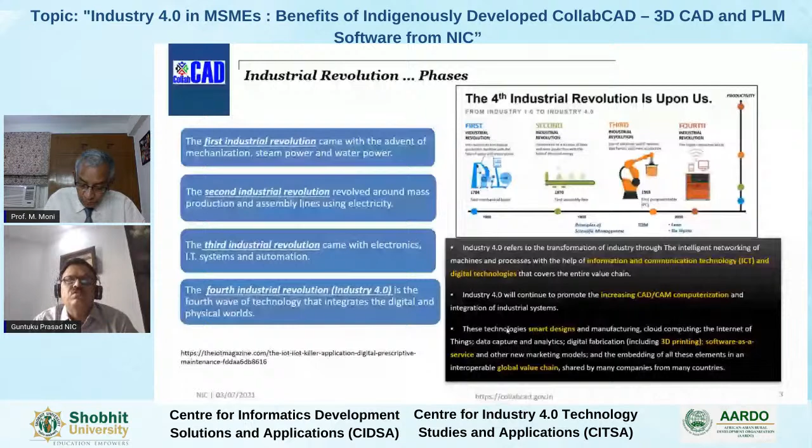So we'll talk a little bit about the fourth industrial revolution, digitalization now. There are a lot of technologies helping in the digitalization of Industry 4.0, which may be relevant to the manufacturing industry. Some of the things are advanced robotics, where we talk about industrial robots, and a lot of integrated sensors and standardized interfaces which help in digitalization.

Recently we are talking about the second topic, 3D printing, which is additive manufacturing technology. It's especially useful for generation of spare parts and prototyping, and it helps in decentralization of 3D facilities, reducing the transport distances and the inventory also.

Then augmented reality, virtual reality, or recently called mixed reality. It is used for maintenance activities, for logistics, and even for training, and it helps in a lot of demonstrations, especially for supporting information of the products. Especially you use the glasses and all, it's all digital technology which is used. A lot of research is being done right now in academic institutions also.

Then some of the things like industrial internet, which talks about networking of machines and products. It's also important to have a good cloud infrastructure so that you can manage the huge data volumes using open systems. And it helps in having real-time communication for industry, manufacturing, and production systems.

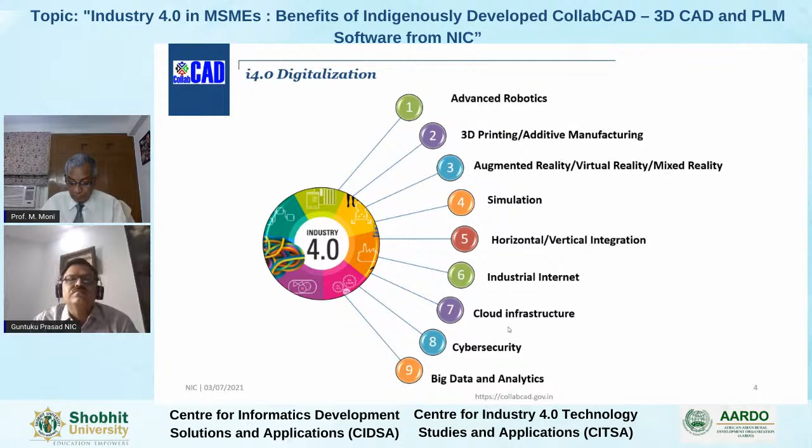So a little bit I'll touch about 3D printing, which is a hot topic right now. We talk about traditional manufacturing, where it is mostly subtractive and there is a lot of wastage of material, with operations like drilling, turning, and shaping. Basically, if you have a building block and you're trying to manufacture a part using traditional manufacturing, there is a lot of material wasted.

The advent of additive manufacturing has helped to fabricate a physical three-dimensional part, typically from a CAD model generated in CAD software, by quickly automating using a total flexible manufacturing process, so there is less wastage. Especially if you see the second figure, there is a lot of layer-by-layer based manufacturing, and so there is less loss of material.

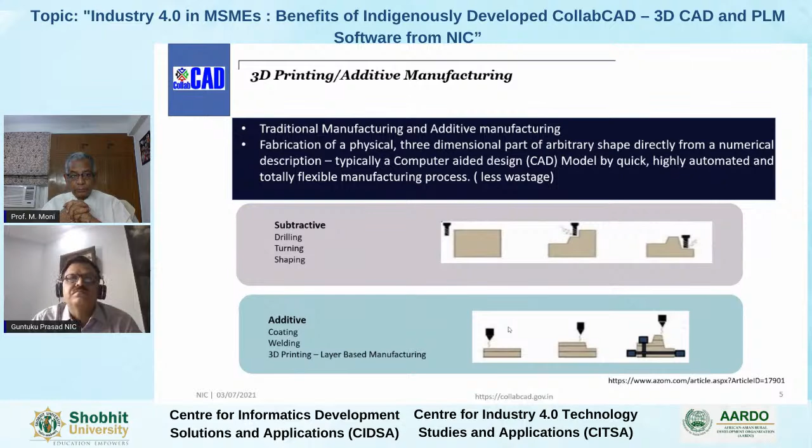Obviously you will get a lot of benefits of 3D printing. These are some of the benefits we are representing pictorially. Making repairs is very easy, like automation and all, and it even reduces the material wastage.

Especially, they are able to print directly using body parts, and a lot of localized production can be done, which helps the growth of economy and logistics. It improves the logistics scenario also, and enables flexible and efficient manufacturing in the industry. And especially the most important part is reduced wastage, so we have a lot less wastage of raw material.

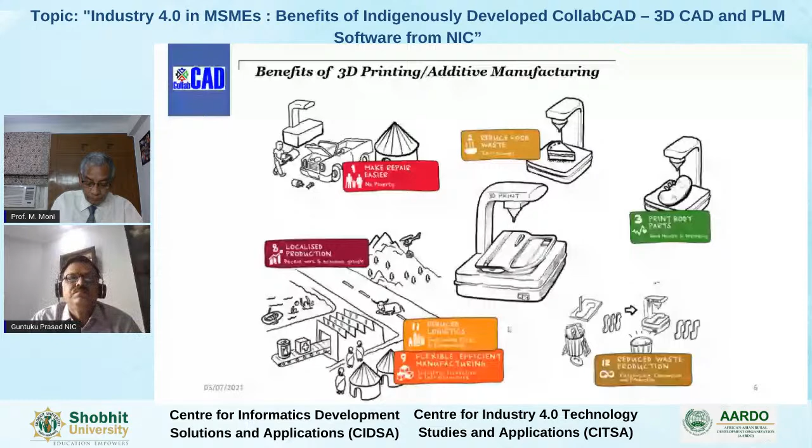These are also some of the technologies. I'll talk a little bit about virtual reality. It's all digital technology, an interactive and believable virtual world which is generated in a computer, used especially where a user can explore and feel the real things using a virtual reality glass.

So obviously, if you are developing this technology in software, you want the 3D image to change smoothly as you move your head, assisted with a head-mounted display, and so it creates a realistic 3D perspective of the virtual world.

So it helps in a lot of simulation and training activities. With VR, users can train in dangerous and complex environments, practicing their skills within the safety of a virtual world before you try to use it in the real world.

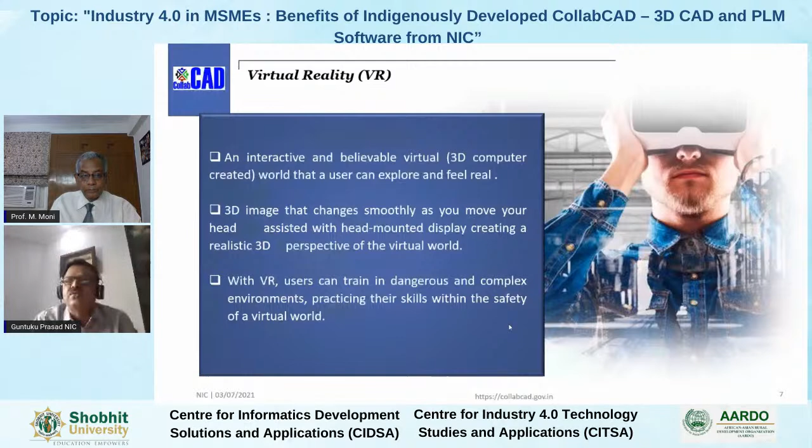Next, we talk a little bit about augmented reality. It's all about connecting the real world we experience to the vast virtual world of information available about the object, the product. So with immersive design, engineers, designers, and even builders can quickly and conveniently digitally transform their CAD data into interactive real-time experiences in a highly simulated digital world.

CAD models are effectively used to present your products in augmented reality. We can show the models of your design, plants, or even machines in meetings or sales talks. AR, VR, and MR help you navigate easily to a data-rich design environment for making better informed decisions and creating a good experience about the product before it reaches the real world.

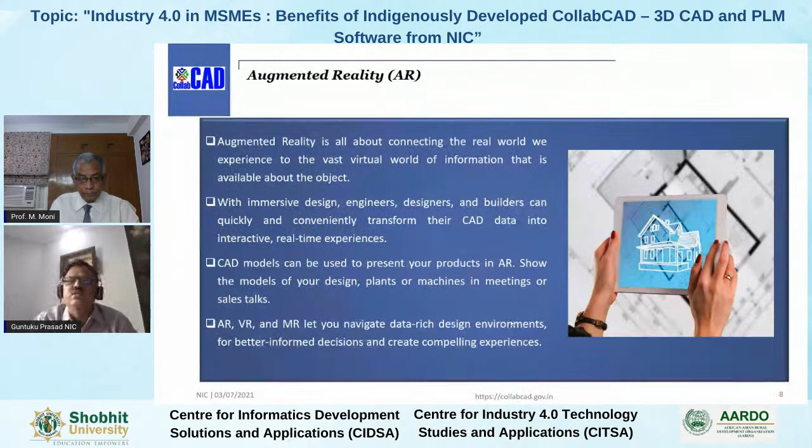Recently we are hearing all about mixed reality. It's a combination where the user interacts with and manipulates both physical and virtual items in a digital environment. A lot of sensing and imaging technologies are used to develop this software, allowing you to see and immerse yourself in the world around you while interacting with a virtual environment using your own hands, without ever removing your headset.

Augmented reality, virtual reality, and mixed reality are changing how we design, create, and experience everything from product factories, buildings, and cars to training, learning, and even the entertainment industry.

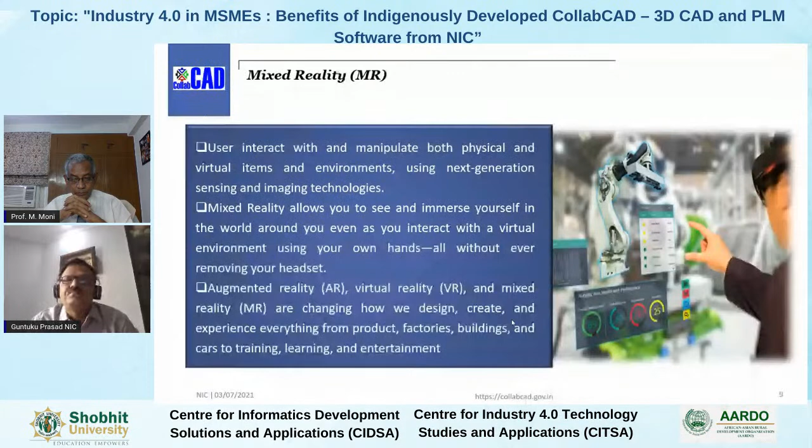As we discuss this topic, we are talking about the role of MSMEs and some of the challenges they are facing in this current scenario, especially in the pandemic. Historically, MSMEs in India have been contributing very silently, you can say, and effectively to the growth of the economy.

Certainly digital transformation using Industry 4.0 is a step in the right direction. With the vision of the Prime Minister's Atmanirbhar Bharat and even the Digital India mission, there is going to be impetus on a lot of these digital technologies around Industry 4.0, especially smart design and manufacturing.

We hear about IoT, Internet of Things, infrastructure being developed around it, and devices being designed keeping IoT in mind. The cloud infrastructure is being enhanced a lot, along with 3D printing and AI-enabled systems, which use a lot of design data to help predict how a next design can be done using AI. So, there are a lot of challenges.

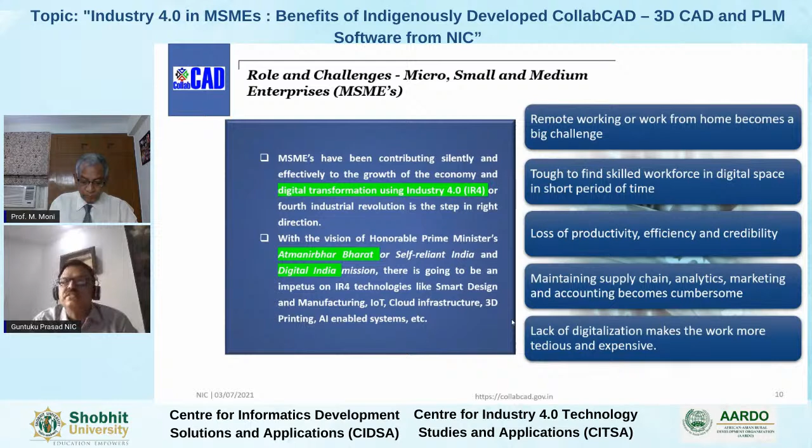Certainly technology can help the industry, MSMEs, in this current scenario. So what can you say about how digitalization and improvement of ICT infrastructure can help in the industries?

There are a lot of ICT tools and infrastructure which can certainly help MSMEs, especially to reduce costs and standardize procedures in designing and manufacturing, and to automate entire business processes which happen once the product is released to the market. This reduces the reliance on manpower wherever possible.

You can use digital technologies to quickly roll out industrial products in the market. Moreover, going digital, especially low-cost solutions, certainly helps, because small-scale industries usually run short on budget. Low-cost solutions, including cloud-ready CAD/CAM systems, will enhance the MSME's competitiveness and understanding of consumer behaviors. The current pandemic and the frequent lockdowns we hear about regularly in the media have been a big challenge to the manufacturing industry in keeping their businesses running and delivering products.

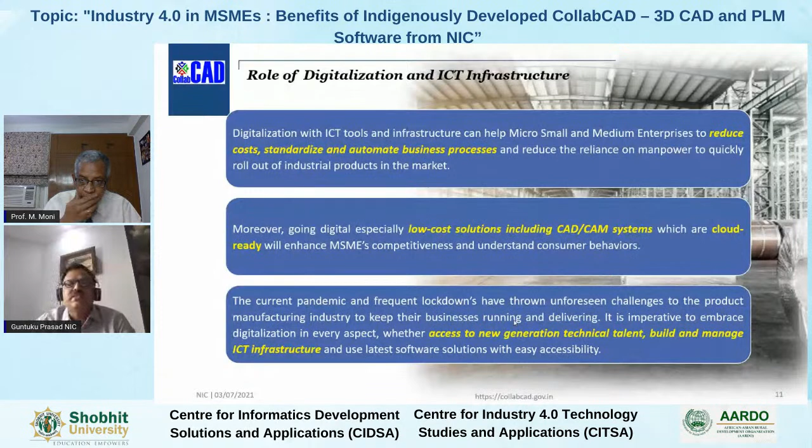It is imperative to embrace digitalization in every aspect, wherever possible, in the entire life cycle of a product - whether access to new generation technical talent, how you build and manage the ICT infrastructure, and use the latest software solutions which are easily accessible and affordable. Open source solutions help in this regard sometimes, and we are helping to develop a lot of these solutions too.

I'll talk a little about the role of industry 4.0 for digitalization in MSMEs. One of the critical pillars of industry 4.0, as seen in earlier slides, can be the starting point for a lot of these implementation projects. It's a low risk entry. Once you have a digitization strategy, any SME can adopt these digitalization techniques in a phased manner.

The focus is basically to combine production, information technology, and the internet. Availability of these three things should help the industries. Digitization of all the horizontal and vertical value chains and all the segments are helpful, along with providing digital business models and customer access using digital technologies.

A digital transformation strategy will offer a lot of opportunities for growth and sustaining competitiveness in the industry market. We hear about flexible manufacturing, improved logistic systems, and interactive and collaborative decision-making mechanisms. These are some things which will help in digitalization in MSMEs, especially helping operational agility, and certainly cost is a major factor - we have to be very cost efficient too.

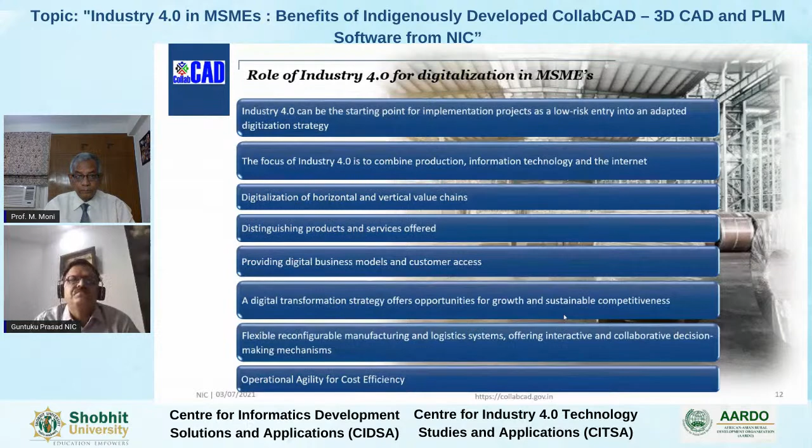Once you know about digitalization, in manufacturing industry we obviously talk about computer-aided design - CAD software is a technology we all know is used for designing physical objects and helps in technical documentation in the form of drawings, which replaces traditional drafting.

We used a lot of paper and drawing sheets, now replaced with an automated process. Basically, it's the use of computers and high-level workstations to aid in creation, modification, analysis, or optimization of a design. This is a very generalized definition of CAD.

Why do you need CAD software? What is the role of a CAD system? You should be able to create good 3D CAD digital models, and it should be 3D print ready. Nowadays they say the CAD model should be 3D print ready, so we usually generate the STL format, which is the industry open standard for a 3D printer.

The technology, if you see the use of desktops over the last 10, 20 years, and cloud computing recently, has been enhanced like anything for speed, especially scalability, and even storage - storage space has become very economical and cost efficient. Keeping all these factors in mind, even SMEs are really migrating to desktop and cloud computing.

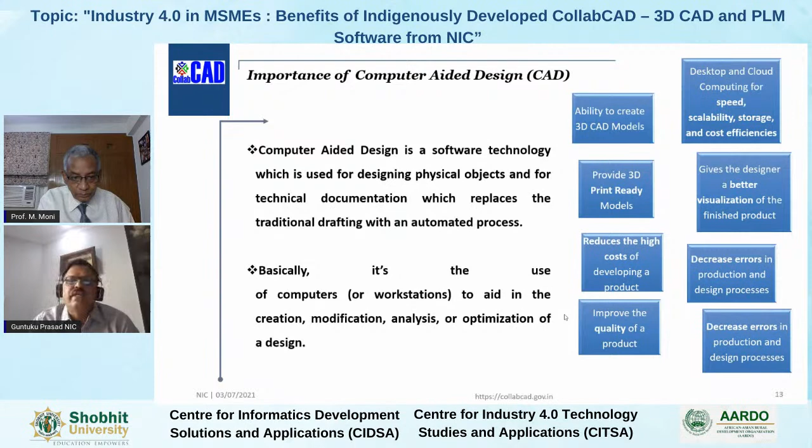These are some use cases where we see the role of CAD software in the industry, especially, and also in the education sector and knowledge building. Skill development is major, with the Skill India initiative and all - we are trying to use a lot of skill development, especially at school level. Now people are aware of CAD concepts before they go into college.

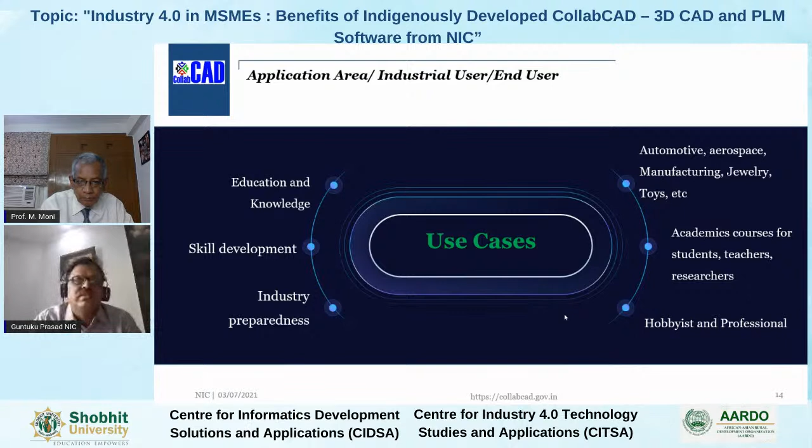Once out of college, they are ready for the industry too. In the industry sector, we have application areas in automotive, aerospace, manufacturing, even jewelry design and toys, etc. A lot of academic courses for students, teachers, and researchers - recently all courses are well tuned in covering the CAD part in their academic syllabuses. And hobbyists and professionals are every time playing around with a lot of open source technologies in the CAD area too.

So now we'll talk a little bit about CollabCAD. NIC, being a premier government organization delivering e-governance solutions across the center as well as state governments, the computer design group was doing a lot of research and development work, developing indigenous engineering design solutions even for analysis. So we developed this 3D CAD software.

It was developed on the Linux platform, and it's available on both Windows and Linux based operating systems. It's a collaborative initiative, as Professor Moni had told in his inaugural introduction. We started with the Computer Division of Bhabha Atomic Research Center and the Mechanical CAD Division at Vikram Sarabhai Space Center in Trivandrum. We used purely open source technologies which are highly reliable, mature and stable, and upgraded as soon as possible. We used a lot of these tools in building CollabCAD, which stands for Collaborative CAD, Computer Aided Design. It has been useful for product design also.

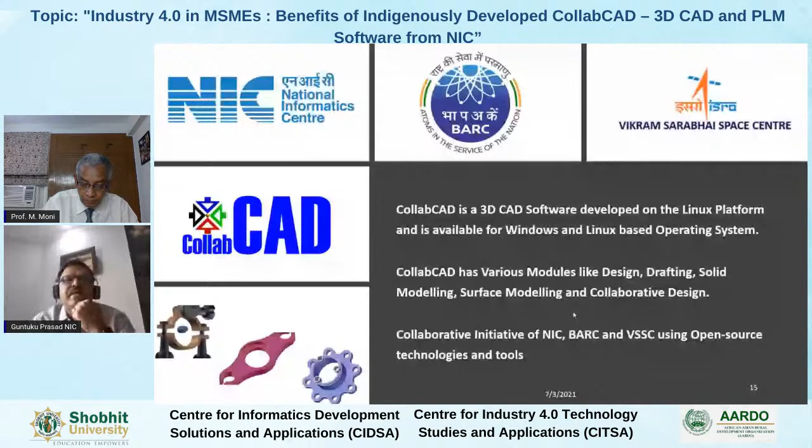A little bit about CollabCAD: we have a product lifecycle management strategy, and we've developed tools which help in the lifecycle management. Especially in design lifecycle management, we take care of a lot of these solutions. It's tightly coupled with the CAD part, where once the part or assembly is designed, we manage the life cycle using the PLM strategy. So an enterprise automation application is available, comprising modules and tools for ERP, CRM, and supply chain management.

So once the design is done, it can be saved on a local system in standalone mode, or on a remote server using client-server mode. The user can also maintain design parts in a content repository system, on a web server or on a cloud anywhere. So that additional facility is there, and this tool helps you build that solution.

It provides an interface to the open source content repository system, incorporating security, locking, and versioning of the engineering drawings and documents. There is also a web client for management of files, creating users, and access control of the repository is very secure. Even files such as Word and PDF documents can be checked into the repository. A modern browser can be used to access this file server, or to view the files.

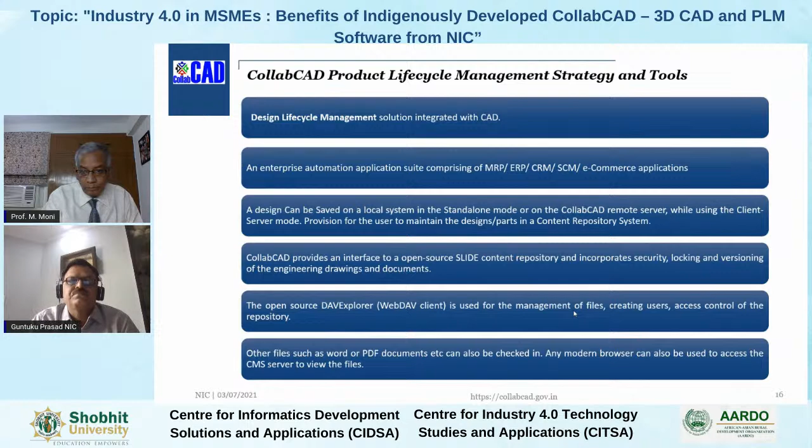The CollabCAD journey, if you see, we have achieved some milestones. It started in collaboration with BARC and VSSC. We collaborated with tool rooms started by MSME, especially in Aurangabad, Kolkata, and Ahmedabad, to connect to the SMEs near the training institutes.

It was part of the PG diploma program for CAD training. CollabCAD was taught to a lot of students over a 3-year period. We have been providing them support, training, resource materials, and troubleshooting also. They have been very cooperative in popularizing CollabCAD in their training programs.

Recently, as cloud technology was evolving, we developed a 3D web viewer using open source technologies. It helps in uploading and sharing 3D design data onto the cloud, and this is deployed on the NIC cloud. We are also part of the National Knowledge Network, which connects a lot of engineering colleges across the country. The software is provided to many of these colleges who are part of the network.

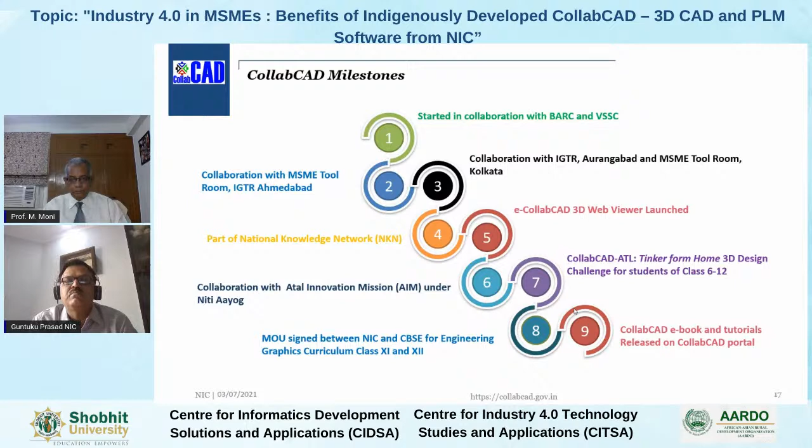So this is a brief summary of the CAD features, the 3D design and modeling features, which a 3D design software available in the market usually has. You can do surface modeling, build surface models from a lot of geometries, even solid models. It's a hybrid modeler where you can do both parametric and CSG based modeling. The geometry is stored as a boundary representation, the BREP format. So there are a lot of options where solid modeling features are available.

Finally, when the part is designed, when you have more than one part, you can use the assembly design module to assemble all your parts and complete the assembly. And once the assembly or a part is designed, you need a 2D drafting module, the plot configurator, to generate engineering drawing views like front view, top view, or section views. You can generate detail views and even generate the title block and connect it to the plotter for printing.

One useful feature right now is collaborative design, which is network enabled on a local network in a secured network. More than one designer can work on the same part, and you can create, edit, and modify the part design. So it's a very useful feature, especially in a collaborative environment.

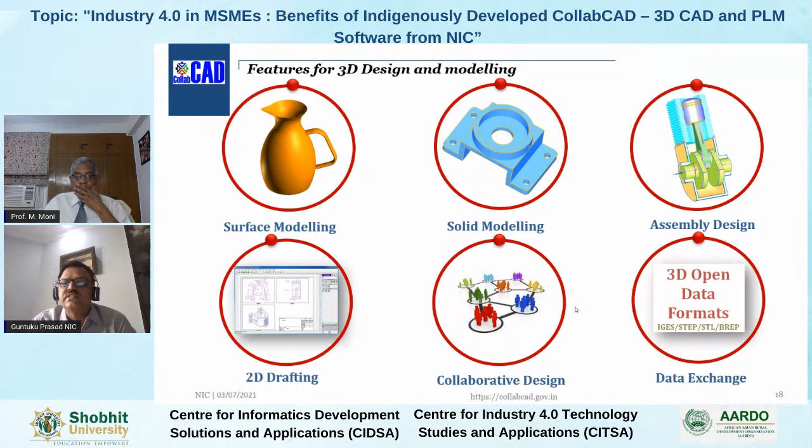For 2D, we have DXF. It will be supported shortly.

Once your 3D model is ready, for 3D printing it's very useful that the 3D CAD software exports into STL format, which is read into a 3D printer that generates all the layers. It does the analysis and generates the model onto the printer using layered technology - it's called additive manufacturing. So CollabCAD supports this STL format, which is compatible with all 3D printers, and it has been tested also in a few locations for the 3D printer.

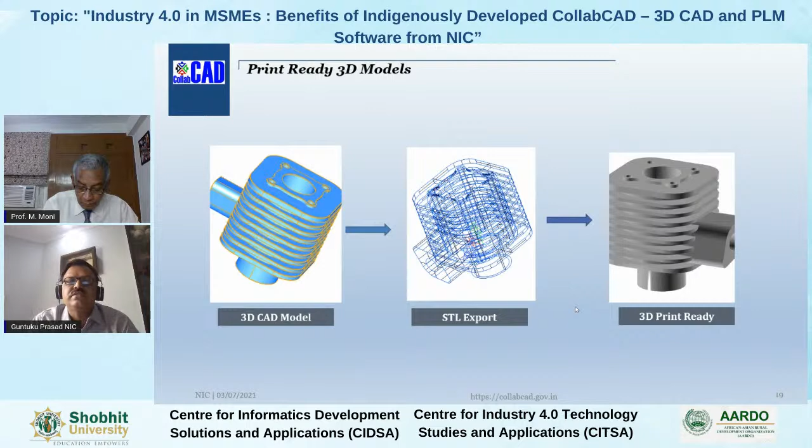So these are some of the additional features in CollabCAD software. It has a 3D canvas for visualization of all your 3D models. You can generate a lot of curve geometry, both 2D and 3D, like lines, arcs, even ellipse, conics, and splines, Bezier curves and B-splines. And you can generate polygons and combinations.

Another important feature is you can generate a 2D sketch using two-dimensional constraints, geometry constraints, and distance-based constraints. You can complete a full 2D sketch from which a solid can be generated.

3D part and assembly design is a very important module - surface modeling and solid modeling, which I talked earlier. And for automation, if you know programming in Jython - it's a Java implementation of Python - you can write automated scripts which will help you in generating a lot of standard parts that you regularly design. It's a very useful interface for those conversant with programming.

And our GUI is highly customizable - you can customize the menu bar and the toolbar. And as stated earlier, we are supporting industry standard open data exchange formats.

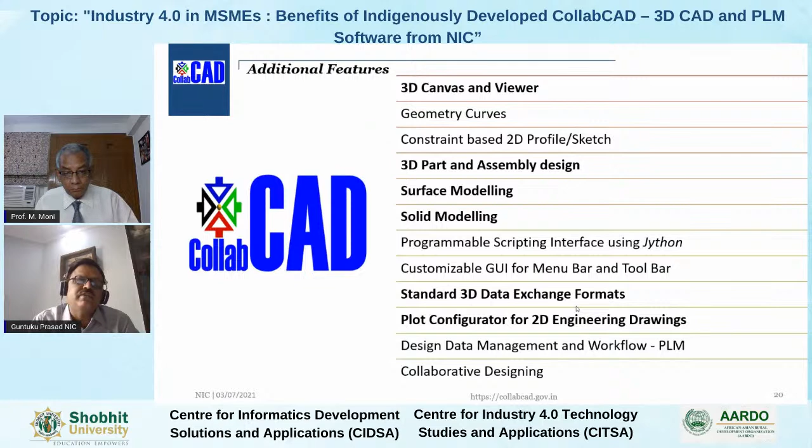So once all your design documents are ready, the design data is ready, you can manage it in a PLM software module, which is already available in CollabCAD. Collaborative designing, as I told, is all network enabled. Whenever a team of designers wants to work on a single design, they can use the collaborative design module also.

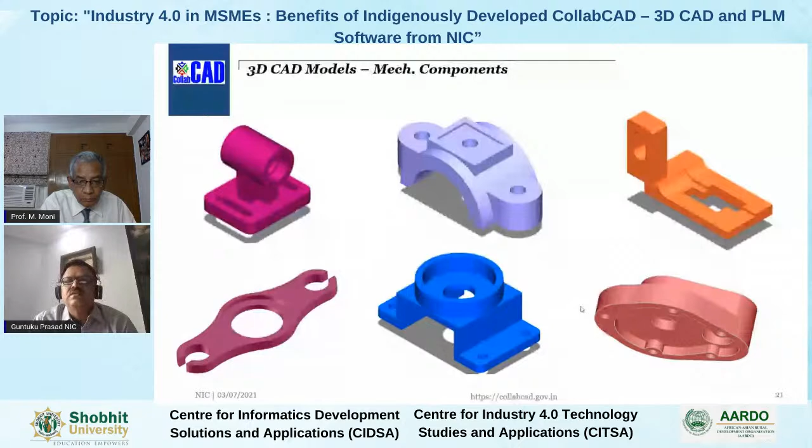These are some of the components which we have modeled in our software. These are all machining components, so mechanical industry. A lot of models are uploaded onto our shape gallery in the CollabCAD portal. These are the assembly model, press tool assembly. Even a spanner set is there. It's a clamp block, you can say.

So these are all colorfully generated in the software also. There are a lot of features you can play around with, like the color of the entity.

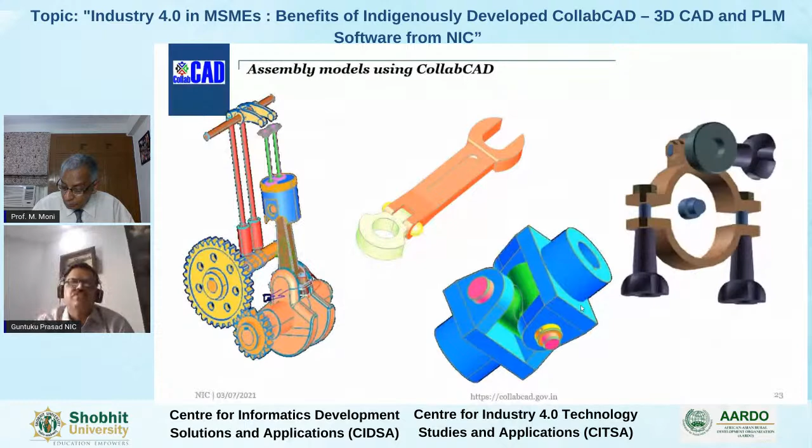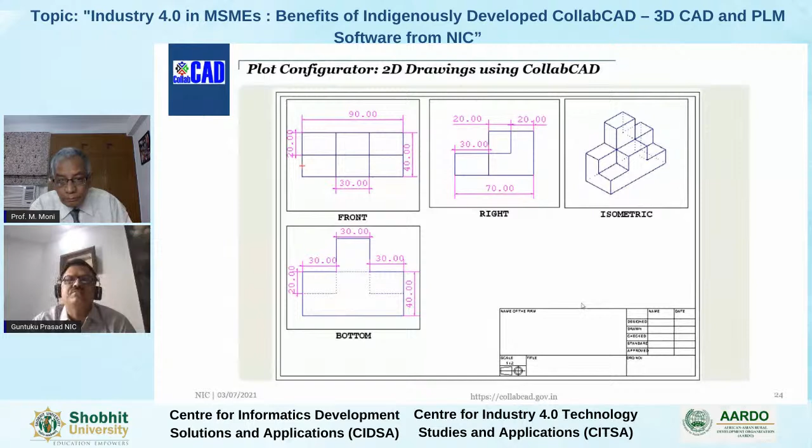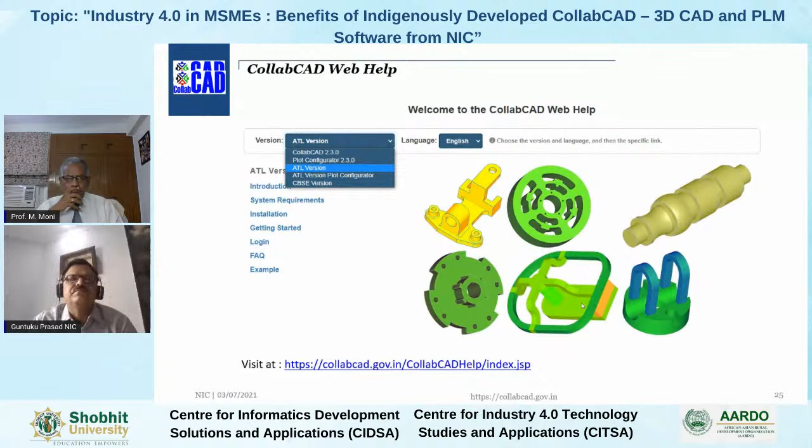Now I'll talk about one of the important tools we have. It's a very useful tool recently because of the advent of internet. We have developed this cloud-based 3D viewer, called e-CollabCAD. It's a product for any geometry mesh visualization, including CAD data. You can also open 3D formats like STL, OBJ, PLY. VRML is for virtual reality, MUZ is the CAD data, and JSON is another CAD data which we are using for the cloud.

So it's a product that allows uploading and sharing, which is a very useful feature right now. The industry can very much use it for sharing of 3D design data on the browser. But you have to create an account. The account is right now free. It went live in 2019 for the public. You can say it's like a social media account, but for engineering data. So you don't need to install any extra software or plugin to view this 3D data on the fly.

You can have your own private gallery or a public gallery. You can share your data onto the public or keep it in your account. It works on all desktop, and has been tested on all desktop and mobile modern browsers, because all modern browsers support WebGL, the industry standard, and HTML5. So it helps in basically visualization of the 3D data on a browser or a mobile browser.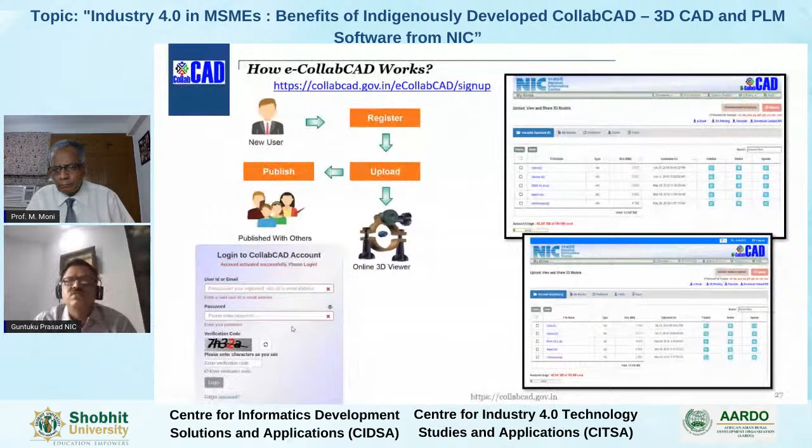So these are some of the technical features of the 3D web viewer - 3D visualization on the browser. We have tested it on all modern browsers like IE, Internet Explorer, Google Chrome, Firefox, and even Opera. So you can upload or share these 3D models.

And once the 3D model is available on the browser, you should be able to render it. So we even show the wireframe model, the mesh model, and the shaded model with facets. You can have a sectioning view, clip a 3D model, and simulate a 3D environment mapping, so you can see how the product looks in a 3D environment. The basic primitives can also be created for education purposes, so students can learn what are the different types of primitives. So the main criteria is you don't require separate software installation - it runs on the fly on the browser.

So this is something like a summary of the 3D viewer. We have the model tree, we have the different views, which a typical CAD software also has, the views, primitives.

This is the visualization options for rendering. You can have a smooth, flat view, wire mesh, textured.

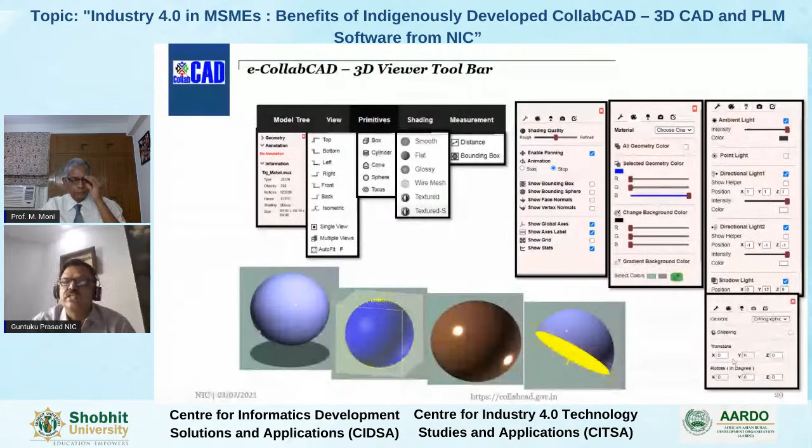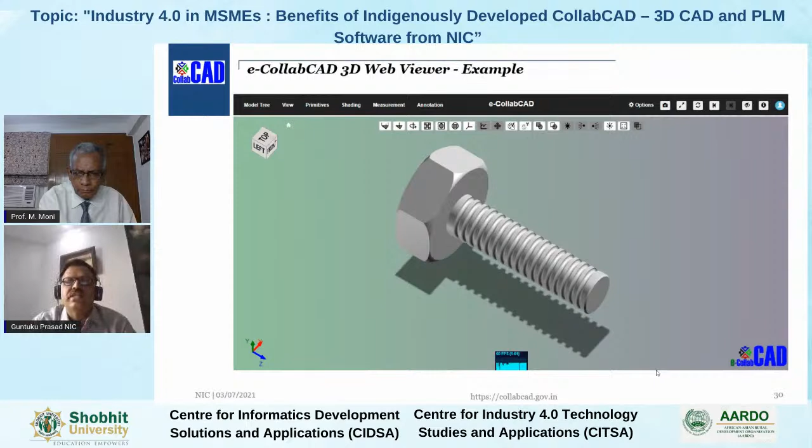This is a sample output of a 3D part, you can say a screw part, which has been uploaded onto the 3D viewer. So the entire interface is like a CAD software only. You can play around with this and share the model to your stakeholders.

This is just a small simulation of environment mapping. This is the Jeep model which has been modeled in CollabCAD and uploaded onto the 3D web viewer, and we have created around a 3D scene for mapping.

So you can control your camera angle, both orthographic and perspective projection. So you can move around your camera and translate the model also.

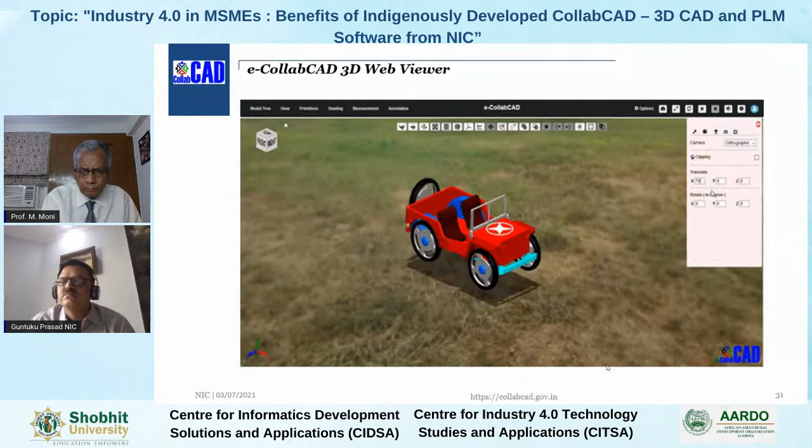This is the structural model of the Taj Mahal, which was designed and created in CollabCAD, and the model is now uploaded onto the 3D web viewer. So it can be a useful presentation tool also. This is the wireframe model, you can say, and the shaded model.

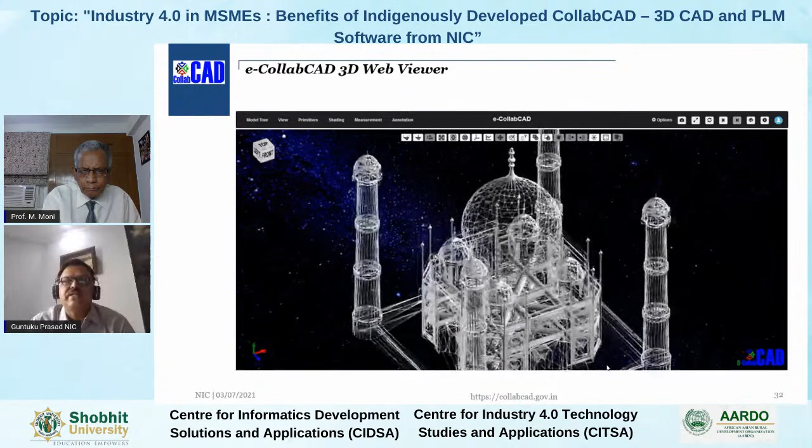The similar features are available in the CollabCAD standard desktop mode also. The same features are available.

So just to summarize, some of our partners and stakeholders who have helped us in the journey of CollabCAD, we should thank Vikram Sarabhai Space Center, their engineers and scientists at BARC, who have helped us in the development of all these specialized modules in enhancing the CollabCAD software, and Atal Innovation Mission for promoting to students.

Now CBSE has been a very important stakeholder, we are closely working with that. Even we are trying to promote now even in engineering colleges and for the syllabus in AICTE colleges. Hopefully it should be a useful tool for the students for popularizing the software.

As usual, we are part of the National Knowledge Network, and to connect to the MSMEs, we have tried to be part of their programs at some of the tool rooms. So we hope to popularize it more in their tool rooms training programs.

Thank you. So this is just a small summary, I tried to cover this thing. This is our URL, collabcad.gov.in, and if you have any query, you can write to collabcad@nic.in.

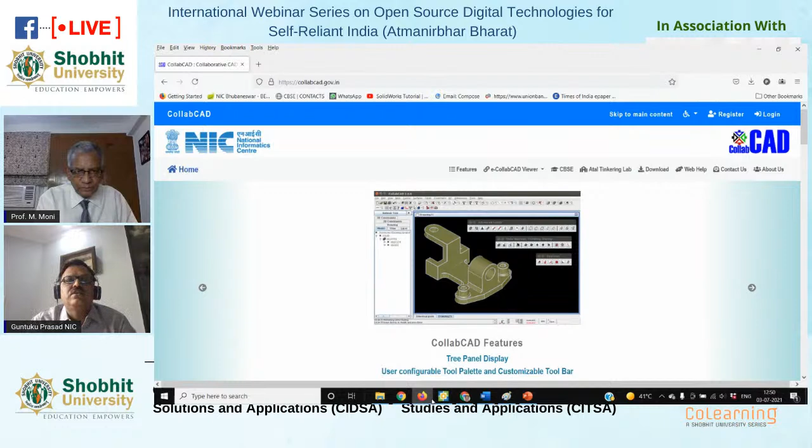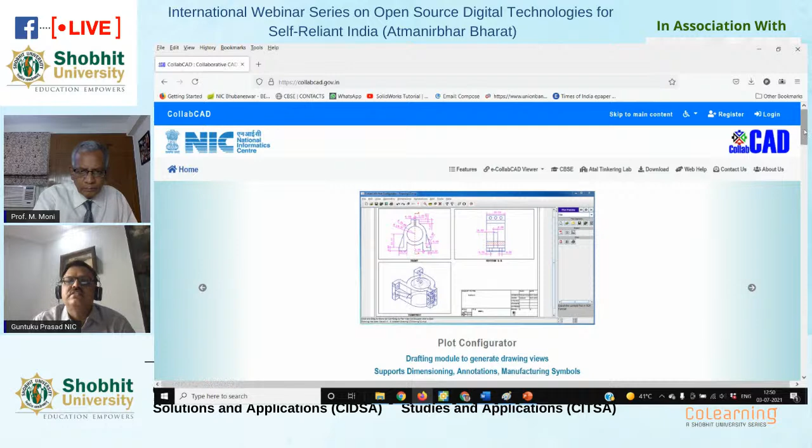So this is our one-stop entry point, you can say, for all the CollabCAD material resources. You can say collabcad.gov.in. This is the landing page, which gives you all the information.

This is a recent session we had for the ATL students. We had a live designing and 3D modeling session. So it has a lot of features about how to, the CBSE corner is there, Atal Tinkering Lab, how to download the online web help link, and I'll scroll down a little bit.

So this talks a little bit about CollabCAD, how to download. This is online visualization, you can say, and some of the models, shape gallery, the recent news, talks about features of CAD and how it works.

So once you log in, I'm already a registered user, so I'm just logging into my account. So this is the dashboard. You can say how many users are there right now.

Recently, in the month of January, we had given an ebook on CollabCAD, which is a comprehensive guide for the students and even for the professionals. It tells you how to create 3D parts.

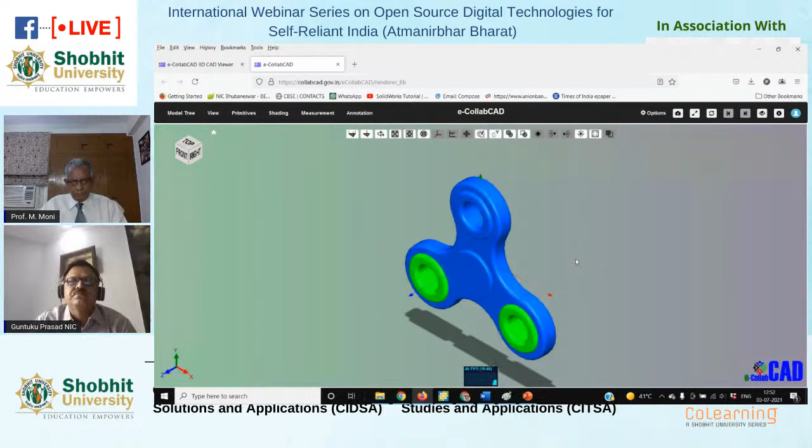So this is a user interface. You can interact with that.

So I applied some small textures. This is the model tree. It shows what are the entities, the current information, and the file type. So these are some of the things which we have.

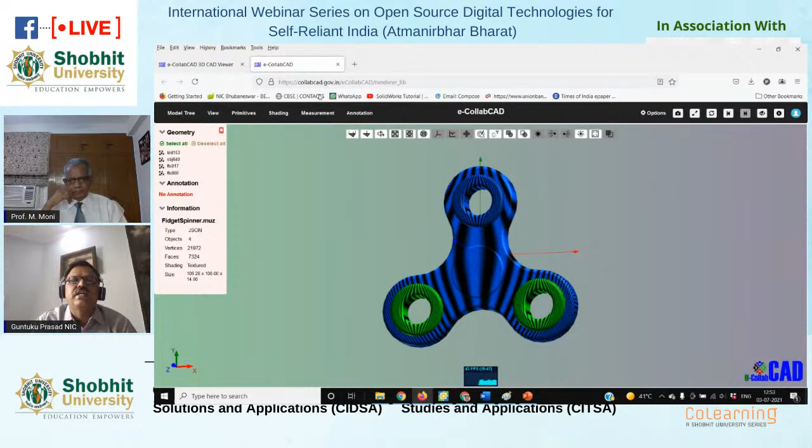Similarly, here we have the option for how to download CollabCAD. Once you go to the download page, if you are a registered user, you will get options to download the CBSE version. For general industry people, they can download 2.3.0, which is the last stable public version, available for Windows and Linux.

It has been tested on various Linux operating systems, especially open operating systems like CentOS, Fedora Core, Scientific Linux, Ubuntu, and Mandriva. So a lot of versions are available, and you can use Linux also. Windows obviously works on 10, even on 8.1, even 7.0 it still works.

So we are providing regular support on this. Students have helplines available, with an email address to contact for ATL students. General people can write to collabcad@nic.in.

This was recently, the last 3D design challenge we had done for students. So these are the list of winners, you can say. So once you have this, this is the file upload module.

Like in my account, I have these files here. So you can browse the model to upload. The interface will come up locally, you upload the file, and it will be uploaded to the cloud. So you can later view it or share it to the public also. Once you share it to the public, it goes to the public gallery.

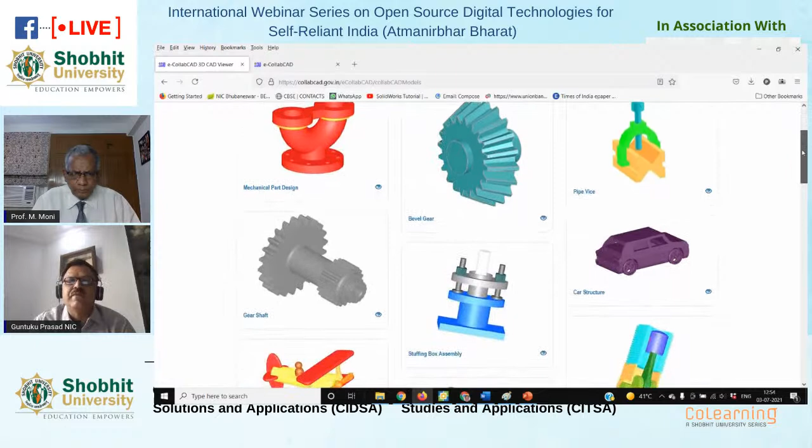Even you can, this is a shape gallery, you can say these are some of the components which we have designed in CollabCAD and uploaded as images only. You can see the 3D view also.

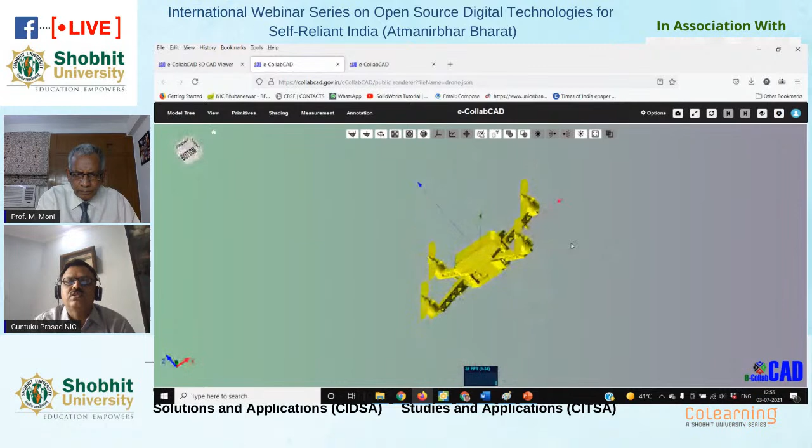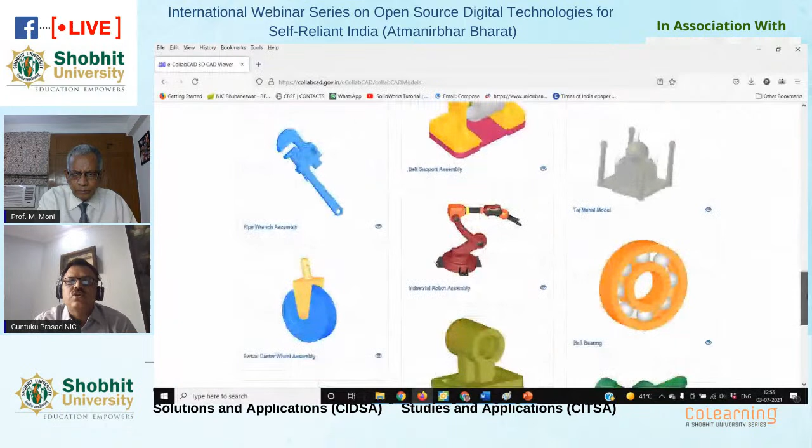This is a small model of a drone done by some student. It has been uploaded. Anybody who has interest, you can browse through. A lot of assemblies are there. Even parts are there, all useful for the industry, especially manufacturing industry. Even surface modelings, like we have done.

I'll just show a small video. This video will try to show how the software can be used. Are you able to see, sir? This is a small example of a coffee mug.

This is our interface, basically how the part design starts. You have to select your view where the sketch has to be made before it goes to. He's creating some small arcs.

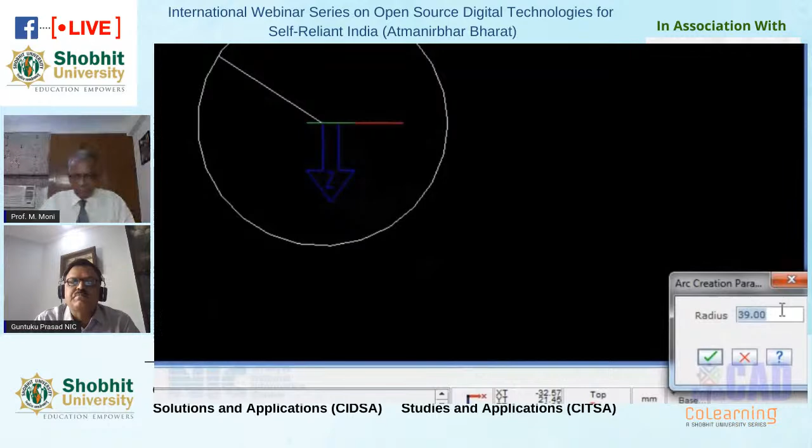So these are the steps, how do you create an arc from a radius and a center. So now once your arc is ready, you're trying to create a solid out of it using the extrusion option.

So you give some thickness to it. So now he's rotating the model dynamically. You can use the keyboard shortcut keys also to play around with the 3D canvas.

He's now creating one more arc. So we need some points also.

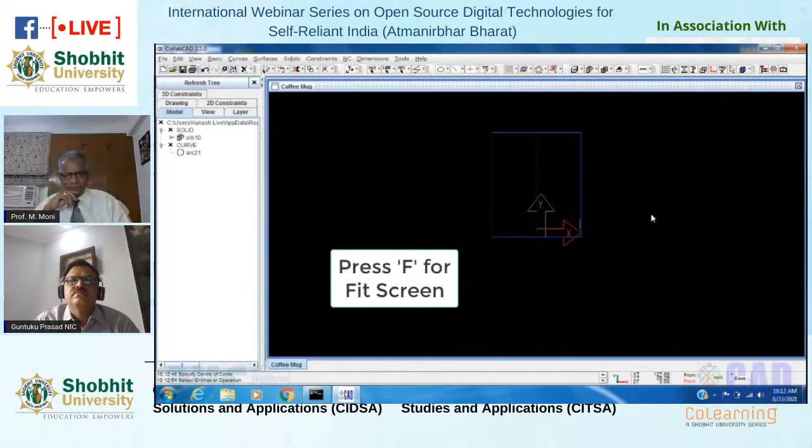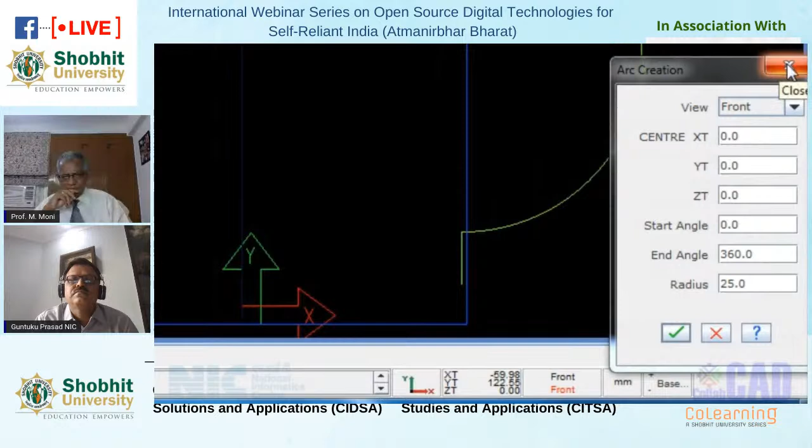So these are some of the steps where you generate the different features. Now he's trying to create the handle to the mug, the cylindrical portion.

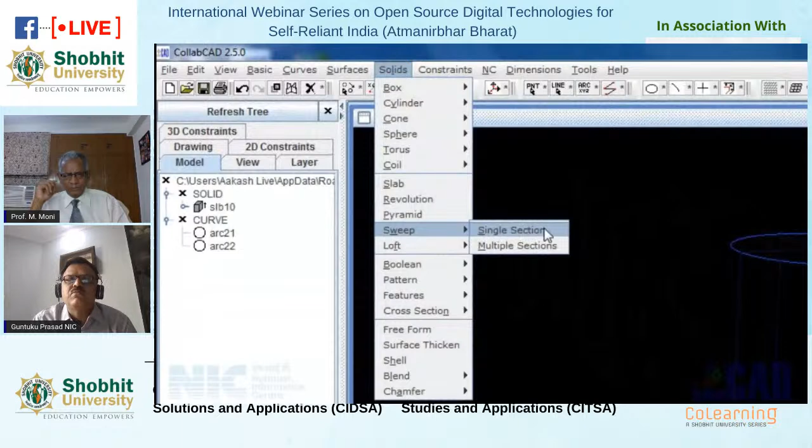We are using some operations in the solid modeling, different operations are there. So we generate the sweep path to create, once the arc is created, it gives the handle.

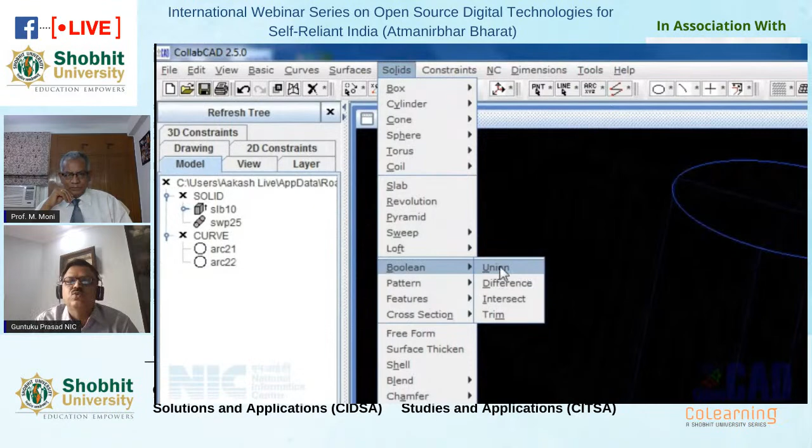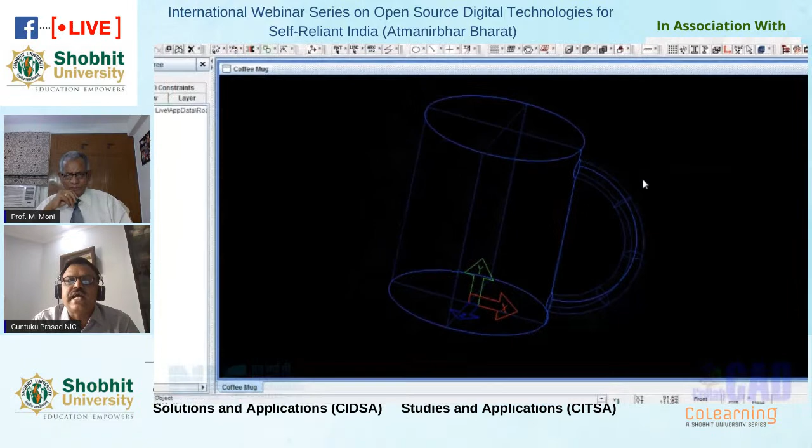There are a lot of menus, the top menu, the edit operations. Now we'll apply some thickness. We'll try to smoothen the cylindrical portion of the cup. Basically, you're trying to union now, combine both the objects here, the handle as well as the cylindrical portion.

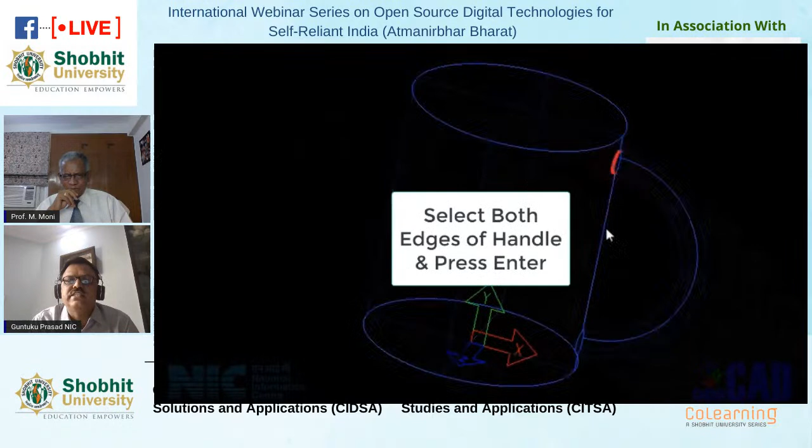Now we are smoothing the edges. So he's selecting the edge there. He'll try to smoothen that edge where it is a transitional area, with some small radius. Now it will be smoothened, something like a fillet, you can say, or a blend.

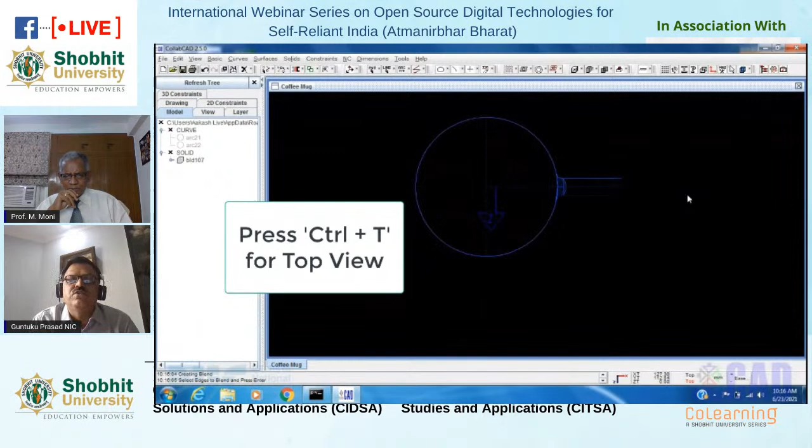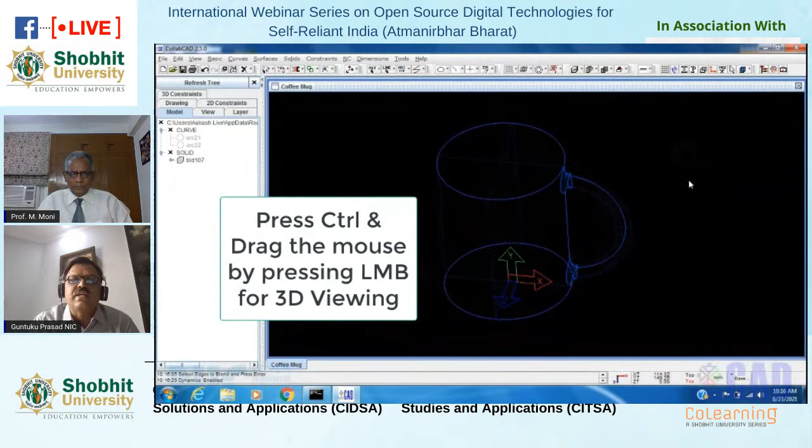You can play around with the views, front view, top view, isometric view, all orthographic projections of the 3D model. Now he's dragging the canvas mouse. Using the mouse, you can move the canvas.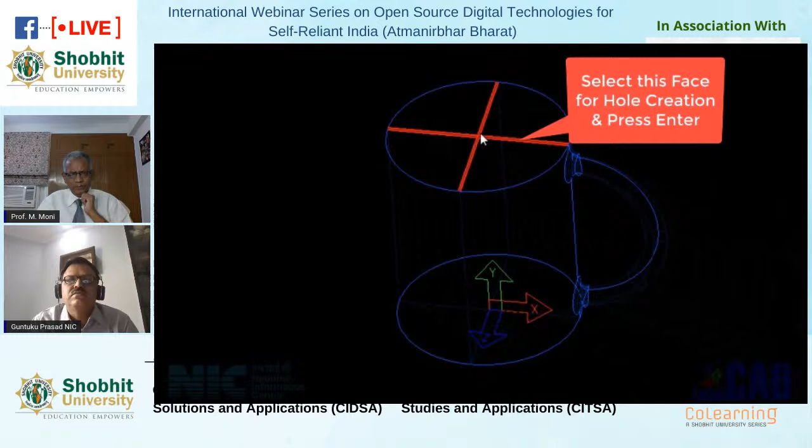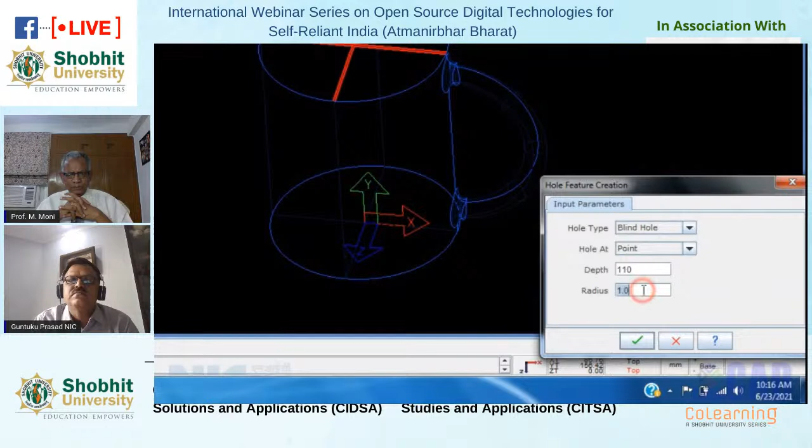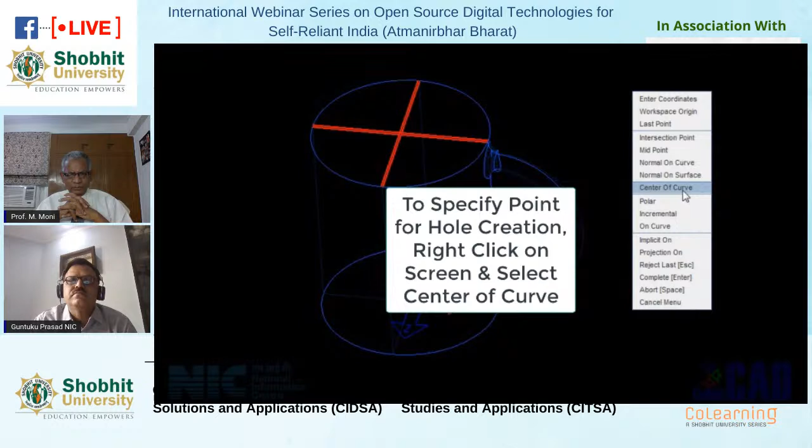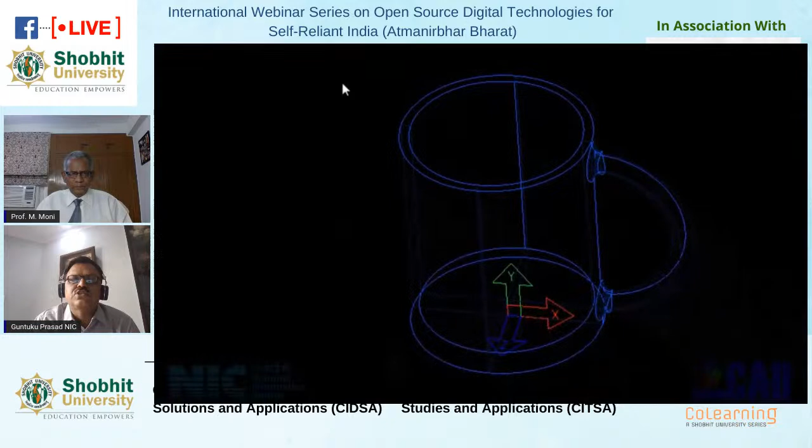Now we'll make a hole here to make the cup hollow. Again, we are going to smoothen the edges here, selecting the outer edges and the inner edges.

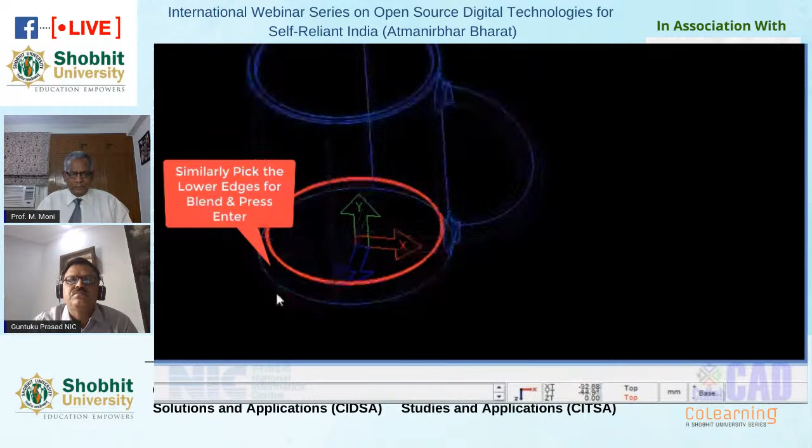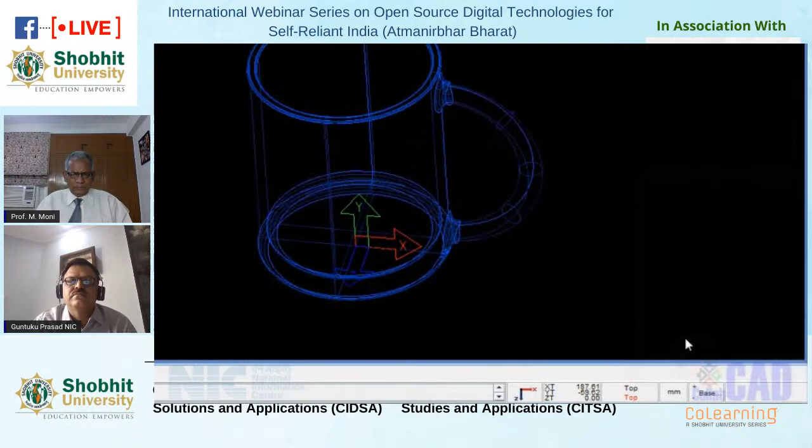With some small radius, similarly you have to do on the bottom edges. So this is the wireframe display of the 3D model.

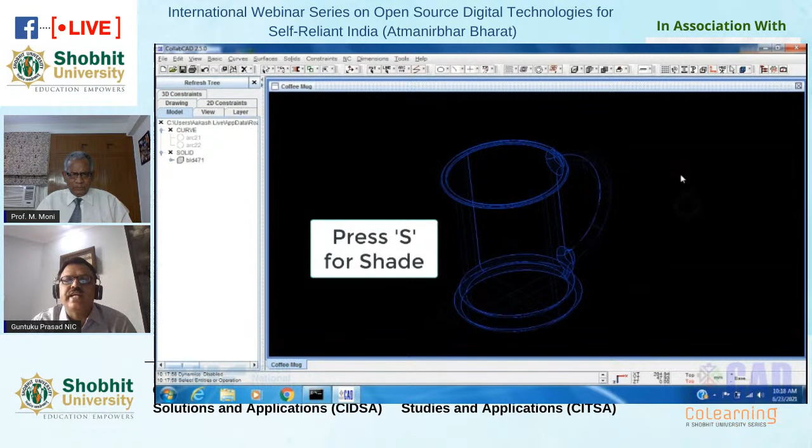It's trying to hide the global axis. Now we'll give some rendering feature, shading the 3D model. The default color is blue, so you can modify the color anytime as per your requirement. Even you can set the material properties.

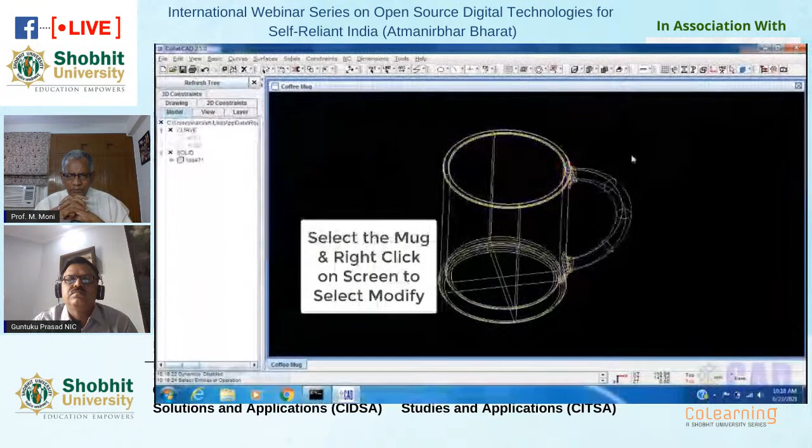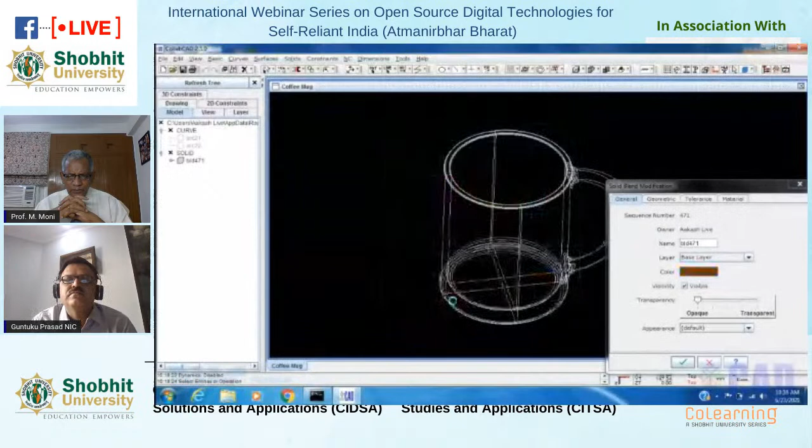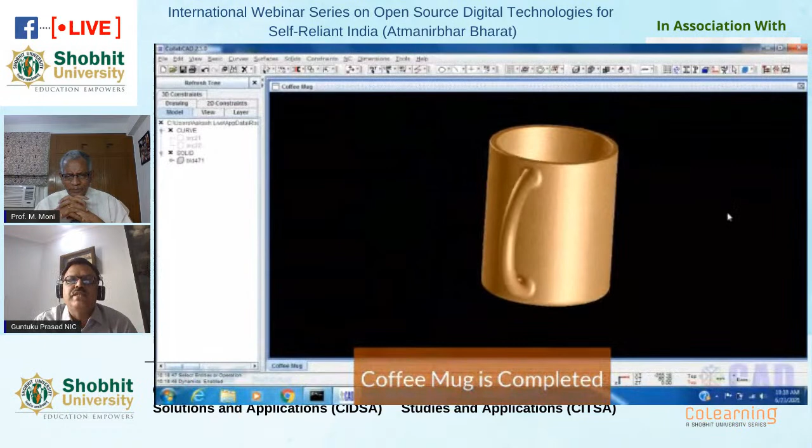Here he's trying to change the color now from blue to some other color. The color palette is popped up, so you can select your desired color. This is now looked at, the coffee mug is completed. So I'll show maybe another small one.

This is maybe one more small, interesting part I'll show. This is our CollabCAD official logo also. I'll try to stop this.

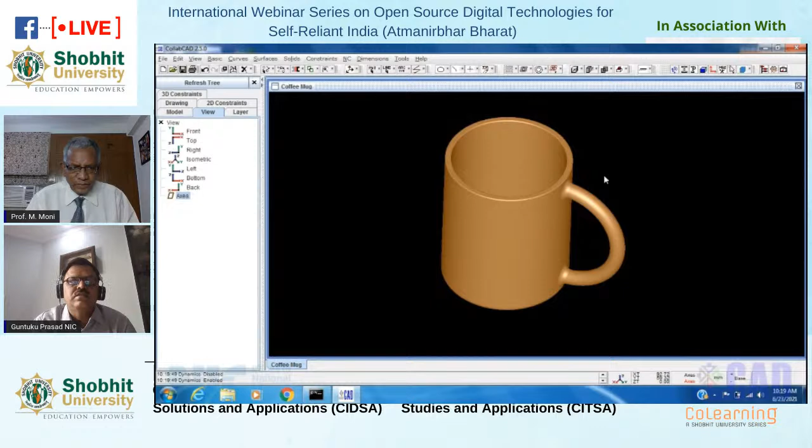Mr. Prasad. Yes, sir. I think it's now very effective. And how much time will it take, this one? No, I'm just checking. Is it the same one or is this also a few minutes? I'll just show it.

This is a small one we did for the school students, the Rubik's cube. So this is also a 3D model.

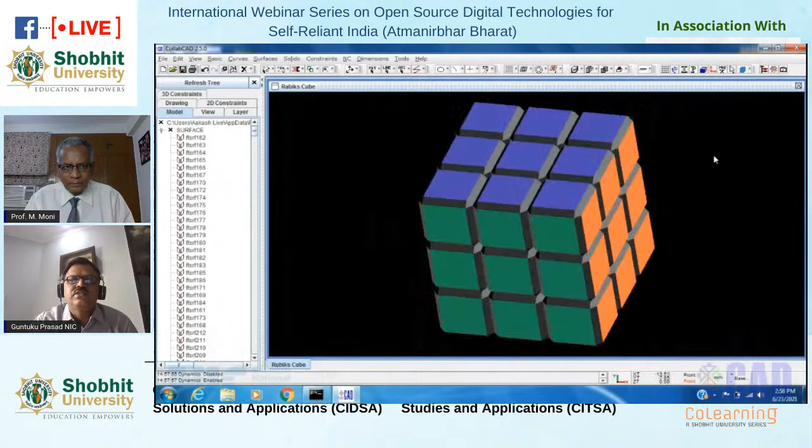These are some of the steps you can say. You can create a box. I'll just drag it also, no problem.

So the different steps are there in creating the Rubik's cube. You create a box and chamfer the edges. So all this is part of the CollabCAD part design mode. Setting up some colors.

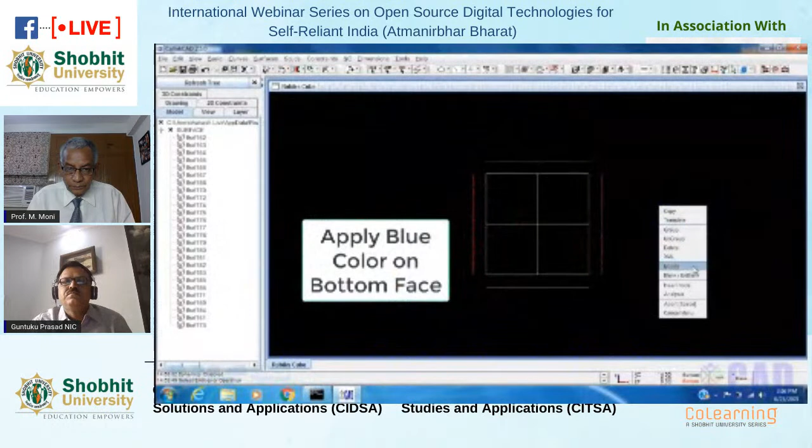I think I'll stop this, and if you want, I can show one small, the 2D module also, the drawing module. Just a second.

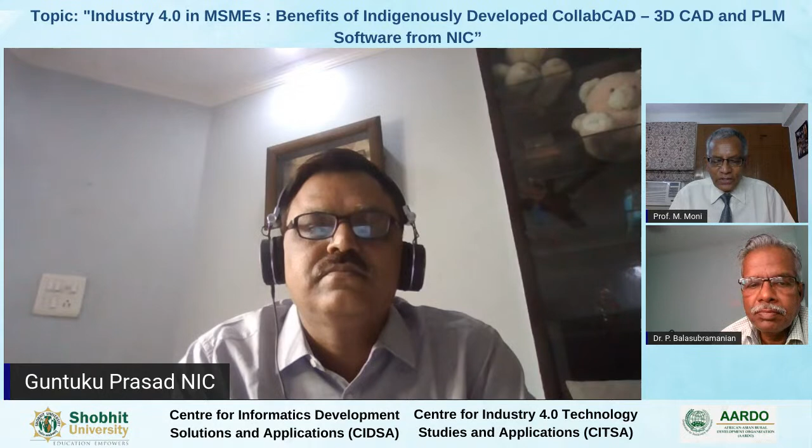I hope nice, Mr. Guntuku Prasad. I have got more insight about the project and the research work, developmental work which has been done by the CollabCAD division of NIC. I got more now than when I was in service. It was very nice that there is a lot of developmental work which National Informatics Centre is doing. The CollabCAD division is doing it, and it is a wonderful presentation for the benefit of MSMEs to usher in Industry 4.0.

Now I will request Dr. Balasubramanian. He was also involved in CollabCAD activities when he was in service. Now he is very much effectively involved in creating a framework for digitalization of MSME. So I would like to request Dr. Balasubramanian very briefly, what is the way forward from the talk of Mr. Guntuku Prasad to the MSMEs. Over to Dr. Balasubramanian.

Sir, thank you for the invitation and thank you for the permission to share my views. It's a wonderful session by Mr. Prasad. He pointed out various salient features of the CollabCAD, especially it is very much suitable for this webinar series because the webinar series is pointing towards self-reliance of India. CollabCAD was developed or initiated by National Informatics Centre as well as Department of Space, Department of Atomic Energy long back in the same direction, that is towards self-reliance in technologies. Now Mr. Prasad has presented the recent additional features. This is very impressive, and especially it's a very valuable tool for the MSME industries as well as educational institutes.